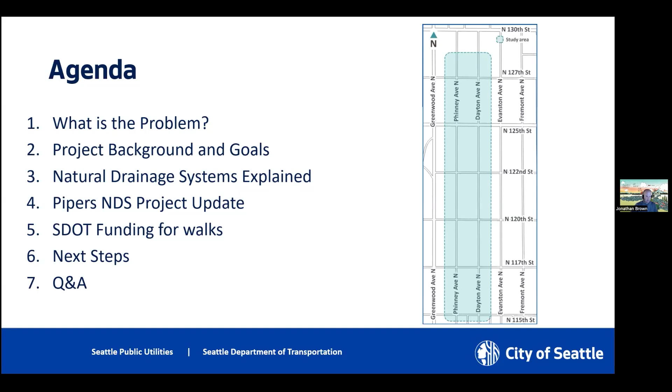So first off, we'll start with some background information on our project goals. If you've been able to attend some of the past project presentations from 2021 or 2022, some of this may sound familiar to you.

Starting at a high level about what the problem is: we live in a very watery city. We're famous for our rain, but also for our beautiful creeks, lakes, and the Puget Sound. So when water falls on the roofs, streets, and parking lots in your neighborhood, eventually it makes its way into Pipers Creek, which flows into Puget Sound. More than 370 billion gallons of polluted water from urban areas are carried into our water bodies by stormwater runoff each year. So SPU and the Seattle Department of Transportation are partnering together to help protect Pipers Creek, the Puget Sound, and all the living things that rely on the ecosystem.

So how do we go about addressing this pollution problem? First, it's important to note that the city has signed an agreement with the federal government, a consent decree, to clean up our stormwater. That program is called the Plan to Protect Seattle's Waterways. As part of the city's regulatory compliance efforts for meeting the consent decree, we've developed an integrated plan—a comprehensive program and schedule for implementing projects and other measures to improve water quality in our waterways. One of the main programs in this plan is to build natural drainage systems in Seattle's creek basins.

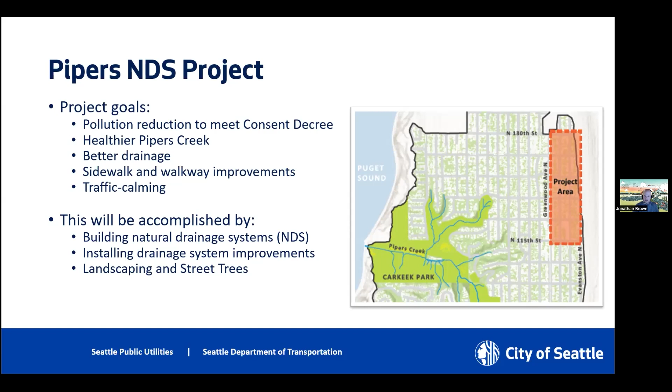The aim of the NDS program is to provide as many of these benefits as possible to the community. One way we do this is by partnering with our city, with other city projects for efficiency, and other city partners like the Department of Transportation. Coming up, Ryan Doherty will give more detail on what SDOT is looking at in this neighborhood.

Next, as part of the background, I want to explain a little bit more about what these natural drainage systems are.

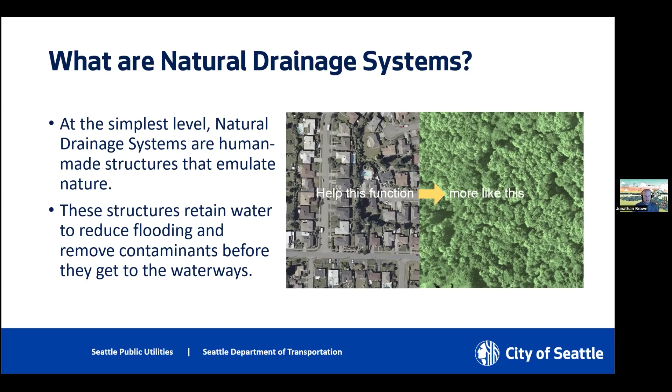This next image shows a bit more detail about how the system itself works. You can see the dirty roadway runoff flows into the landscaped areas and is slowed down by the plants, grass, and shrubs, then filters through this thick, engineered soil layer before it makes its way into this pipe, an underdrain system, where the clean water is then discharged into a deep well for infiltration.

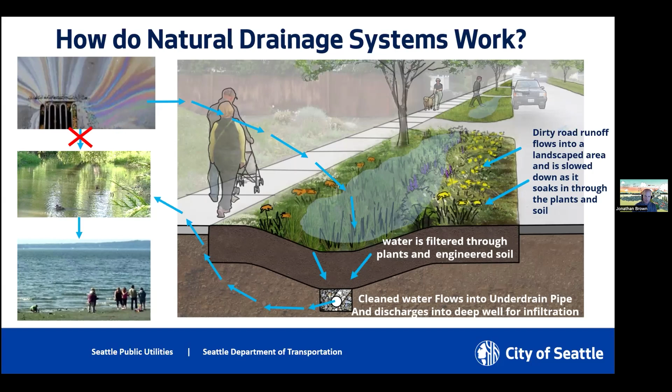The cells will have underdrains, as I noted, and they'll also be lined, so we're trying to prohibit shallow infiltration. The next slide shows the deep infiltration system we have planned. Essentially, we'll be conveying the clean water from the underdrains to the deep injection well system, shown in this image, that will distribute the water about 50 to 100 feet below the existing ground, so well below any basement footprints.

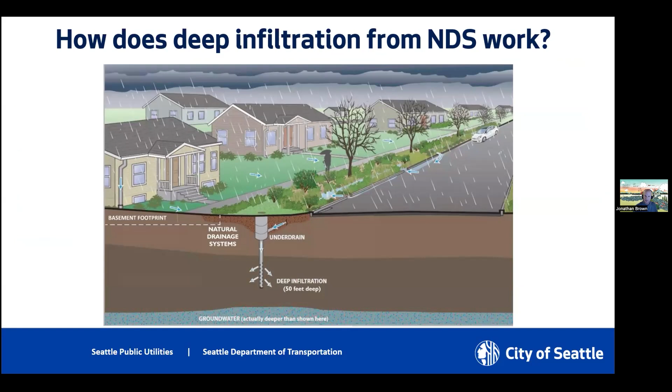Next, we just wanted to give a preview of what these natural drainage systems look like or can look like. We've been working on these projects—SPU has been working on these projects for more than two decades now.

The image on the left is in Ballard, the Ballard Natural Drainage Systems project, and that photo was taken in the spring. The central photo is the Venema NDS project, just on the other side of Greenwood, also in the Piper's Creek watershed. The last image is the High Point NDS project in West Seattle, taken in the fall or winter. So this just gives an idea of how these cells can look across different seasons.

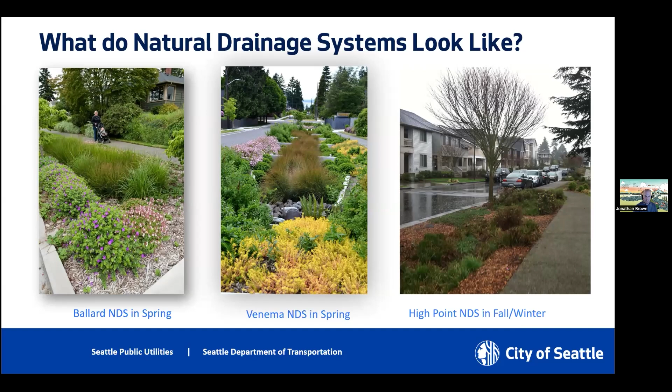The other thing worth noting about these systems is that they really rely on living plants and shrubs to filter the water, so there's a bit of a process they go through before they are fully established. This graphic is really just trying to represent that.

On the far left, that's the landscape planter strip that's been unimproved, where we will be looking to install natural drainage system cells. As we move left to right, you see a newly planted cell, a cell after one year of growth, and finally a cell after five years, once it's reached full maturity.

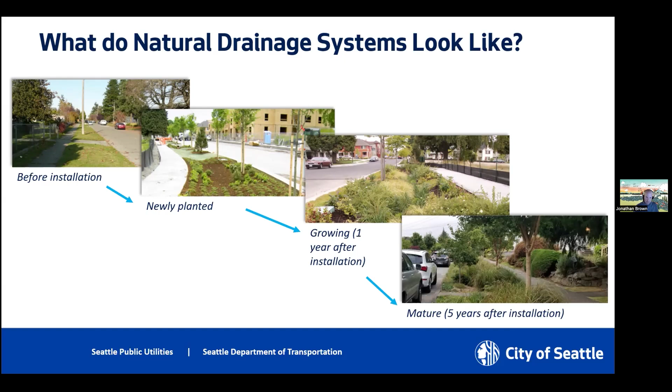Finishing up on the background, I wanted to provide a bit of a project update. We did have a bit of a restart of the project because we needed to expand the study area. We initiated our options analysis phase initially in 2021, starting with around 40 blocks, like I mentioned at the beginning, and we've been going through several stages of evaluating blocks as candidates for these NDS sites.

We performed feasibility analysis in the field to assess where it would be possible to construct these in the right of way. We also worked with SDOT arborists to determine which large trees we aim to protect as part of the project. Some of you may have joined us in the past few years when we've connected with the community in this area, including a live virtual informational and Q&A Zoom similar to this one, as well as an online survey.

Back in 2022, we developed preliminary concepts focused on Phinney and Dayton between 127th and 120th, but we realized we needed to increase the study area back down to 115th to make sure we met the drainage goals for the project that we've committed to in the integrated plan.

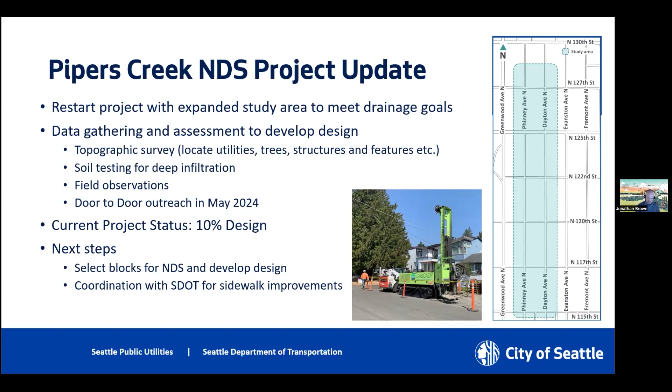Next I'm going to hand the presentation over to Nathan Polanski and our consultant team. He's going to talk a little bit more about how we decide where to put these cells.

Thanks, Jonathan. One of the common questions we get is how do we decide where to build natural drainage systems? There's a lot of evaluation that goes into siting natural drainage systems along a public street. Two of the most important things are the space that's available in the public right-of-way based on what's there today, as well as the city's long-term plans or build-out of the public right-of-way—so SDOT's plans for providing sidewalks and building out the street.

So the space that's available, as well as where drainage runoff wants to flow—typically you want to put the natural drainage systems where stormwater is collecting, so really looking at the downstream end of the blocks.

Those are two of the big technical items, but we've also been looking closely at where the existing utilities are, both above and below grade. Jonathan mentioned taking a look at existing trees and vegetation, and the slopes of the streets. The study area is generally very shallow slopes, so most of the streets from that standpoint work well for natural drainage systems.

We also look at where people are accessing houses, whether it be sidewalks or driveways, and how people are moving along the street. All of that goes into siting cells, as well as coordinating with goals from the Department of Transportation and community input.

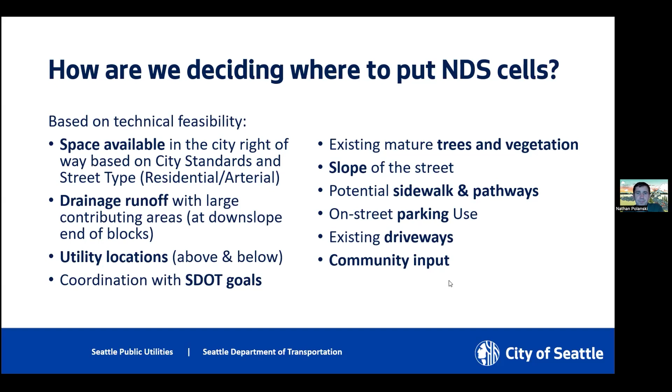Here are some pictures of the study area, showing the variety of conditions that exist along the streets in your neighborhood. The top left picture shows a lot of existing ditch and culvert drainage alongside the road edge, along with some ponding. This is due to the shallower, flatter streets, which cause more ponding alongside many of the streets in the study area.

A lot of the parking occurs off of the pavement. Rather than other neighborhoods with curbs where people park up against them, in our study area people park either parallel or perpendicular off of the pavement. That's something we take into consideration as we look at parking patterns and the configuration of the right of way. The school and church at the south end have different uses of the public right of way in terms of drop off and pickup, so we think about how those operate around those uses.

So all of these are very varied conditions happening throughout, and as I'm sure you know, very few of these blocks have existing sidewalks.

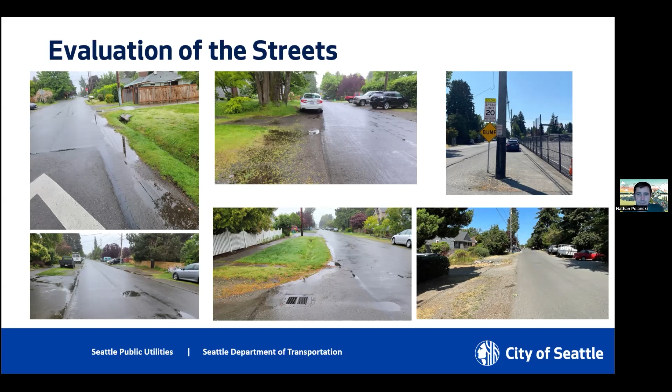So this slide shows the two types of natural drainage systems that are being considered. On the left are standard cells with graded side slopes, and on the right side of the image are cells with structural soil cells.

All of the natural drainage cells that are built will be lined. Water that enters the cell is directed into the underdrain and into the downstream UIC well that Jonathan mentioned, that discharges water 50 to 100 feet below the existing ground surface, so that water doesn't infiltrate directly into the ground near the drainage systems.

The NDS with graded side slopes are swale-like depressions that parallel the street. These are the two images on the left. These cells have really gentle slopes on both sides of the cell, on the roadway side and the sidewalk side, and have a flat bottom area to allow that collected water to pond and soak through the soils into the drain below.

The NDS with structural soil cells has that same gentle slope on the street side, but on the sidewalk side, there's a vertical surface. The drop off between that sidewalk edge and the bottom of the cell wouldn't be more than 18 inches, so it's fairly shallow.

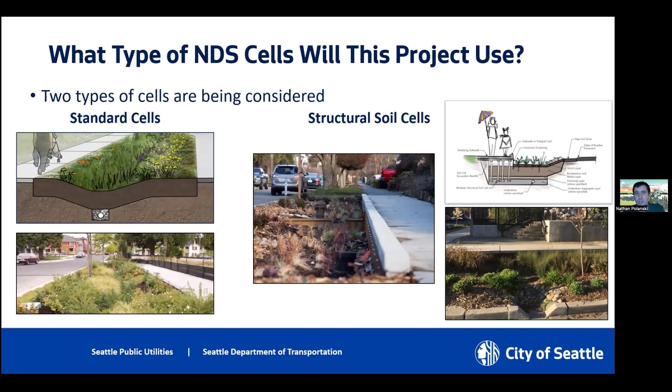This system uses a technology that allows us to put natural drainage systems under the sidewalk and in areas where there's not as much space. So when we're constrained by space or limited by existing utilities, these provide some more options. The images here on the right are from an NDS project that was constructed in North Ballard.

These next few slides show how the existing streets could change with the addition of natural drainage systems and other street improvements. Most of the streets in the study area are residential streets, so they have a 60-foot right-of-way, and what's shown in that top cross section allows for cars to travel in both directions, but really in a single lane, with on-street parking on one side of the street.

However, as I mentioned, and you saw in that image a couple slides ago, a lot of the on-street parking that happens today really happens off of the pavement rather than on the edge of the pavement, which you'll see in other neighborhoods. And then people typically walk along the road edge where there are no sidewalks. So that's the existing condition.

The middle section shows how the streets would change with the natural drainage system improvements and other street improvements. This includes widening the roadway so parking can occur on the pavement rather than off of the roadway on the gravel shoulder.

The edge of the pavement would also be modified to help route stormwater runoff down the block to the natural drainage cells, which will have the impact of reducing the puddling and ponding that occurs along many of the streets. New sidewalks will also be built on the side of the street with the natural drainage system improvements.

The bottom cross section is similar to the middle one, but it shows that natural drainage cell with the structural soil cells and that vertical surface next to the sidewalk. So these are the residential street configurations. This is Phinney Avenue North throughout the study area, Dayton Avenue North north of 125th, and most of the east-west streets from 115th to 127th.

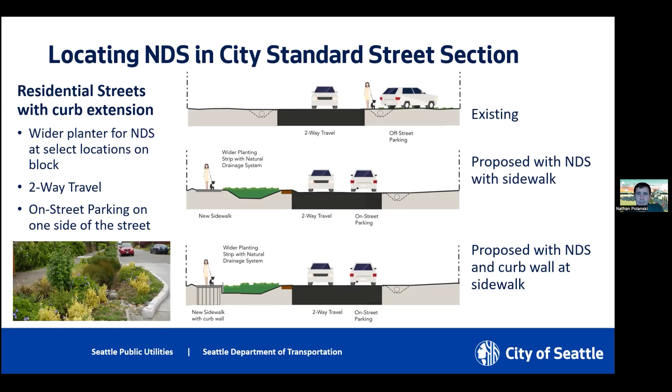The last condition to show is how the NDS could be configured along Dayton Avenue North, south of 125th. This street is classified as an arterial street, so arterials have 2 lanes of vehicle travel. Rather than the single lane that accommodates vehicles going in both directions, there's a separate north and southbound lane.

Dayton also has a 60-foot right-of-way, but to meet SDOT's street standards, street improvements would be constructed with a curb and gutter along the edge of the road. The curb and gutter allows that stormwater to drain down the block to the NDS.

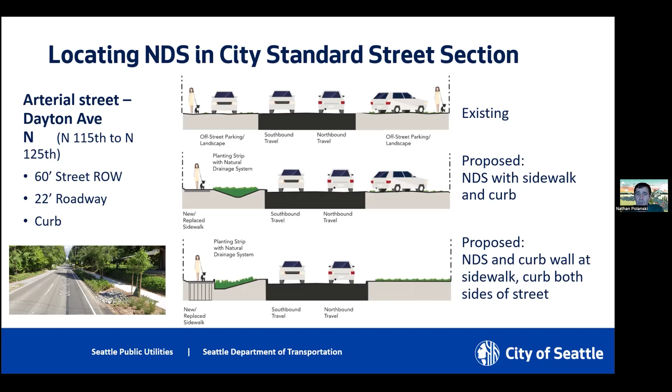However, the big difference with the improvements along the arterial is the curb and gutter will result in a change to parking. Where people can currently pull off the road to park along the road, where curb and gutter is installed, it'd be removing on-street parking along Dayton Avenue.

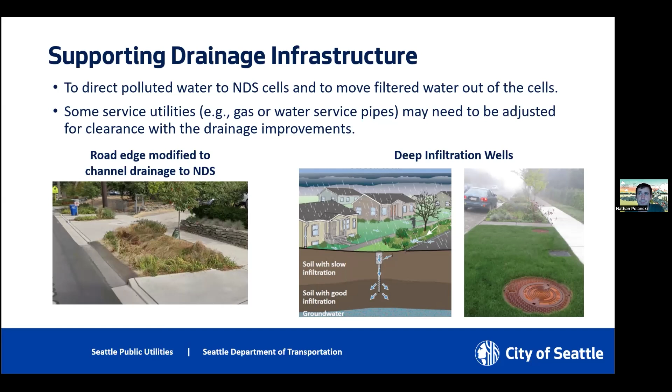Jonathan showed a map of our study area that we started with. Based on the work done to date, this shows where we've honed in on the feasibility for natural drainage systems — both Phinney and Dayton from 115th to the limit of the Pipers Creek Basin. That dashed boundary is our NDS study area. But we're showing those lines extending all the way to 130th, given that SDOT is going to participate in providing sidewalks along selected streets: Phinney and Dayton, and also some east-west streets — 115th, 117th, 120th, and 127th.

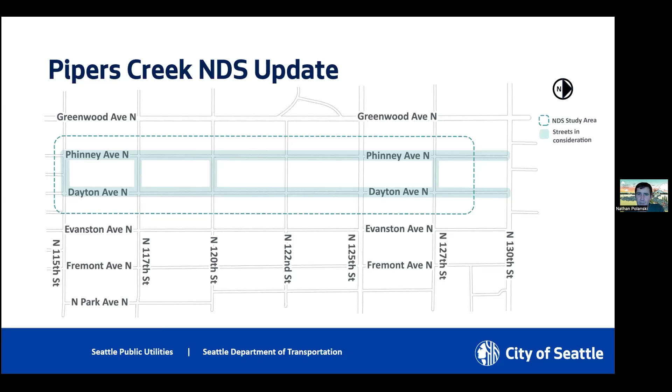With that, we turn it over to SDOT to talk a bit more about the street improvements and sidewalk improvements that are planned as we move forward.

Thank you, Nathan. As Jonathan mentioned, I'm Brian Dougherty. I am with the Project Development Division at SDOT, and I'll be talking about the possible collaboration of SDOT and SPU on this project.

As many of you probably already know, there are very extensive missing sidewalks, especially in District 5 in North Seattle, north of 85th Street. The funding we've had in the past has allowed us to chip away at that need at a relatively slow rate — at that rate, we'd expect to build out the sidewalk network in about 200 years. Not a short-term endeavor. Approximately 27% of city streets are missing sidewalks, and that number is higher on non-arterial streets, and higher still in District 5, where this project is located.

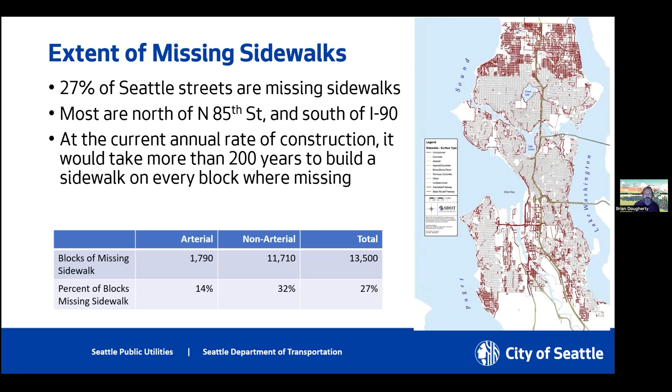Next slide. The city recently adopted the Seattle Transportation Plan, which creates a prioritization framework we use to prioritize the construction and funding of new sidewalks. In summary, it prioritizes areas close to K-12 public schools, parks and other destinations where people want to walk, transit stops, and frequent transit routes. We also include items from the comprehensive plan, like urban villages, urban centers, and pedestrian zones. We also look at safety — speed of traffic, volume of traffic, collision records — and overlay an equity network to prioritize street segments for new sidewalk construction.

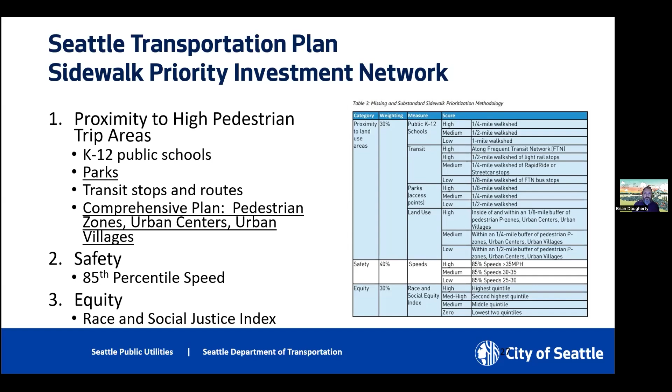This map shows the prioritization of missing sidewalks in the study area, or a little bigger than the study area. Basically, Phinney and Dayton both rank relatively high in the Seattle Transportation Plan, which is why when this project came to our attention, we said we were interested in partnering with SPU to extend the reach and the benefits to the neighborhood, so that we could build more sidewalks than otherwise we would have if SPU was doing this alone.

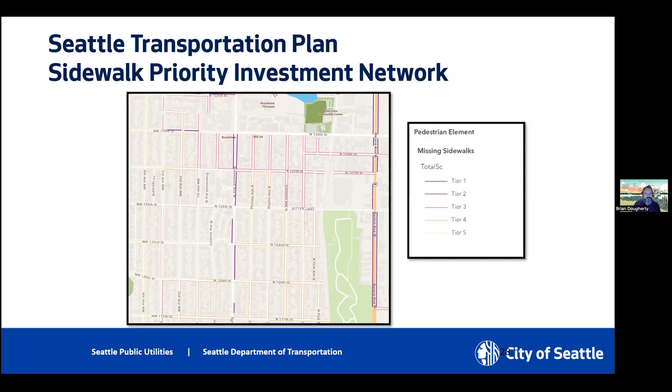Here's some examples of projects we recently completed in partnership with SPU — Southwest Kenyon Street and 24th Avenue Southwest in West Seattle. These are in the Longfellow Creek Basin, and this was a perfect example — there's a comment in the chat about extending sidewalks beyond areas where the NDS is being constructed, and that's exactly what we did here. We partnered with SPU to make sure the sidewalks connected into the existing sidewalk network, so we didn't have sidewalks to nowhere, and provided that additional funding to make that possible.

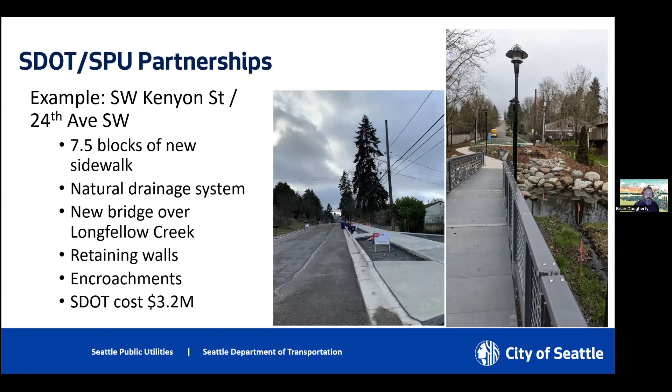Fortunately, three weeks ago we got a new transportation levy, and with the existence of that new levy, we have a large increase in funding for new sidewalks. So this is going to provide us the opportunity to partner with SPU to extend the reach and benefits to the neighborhood and build more blocks of sidewalk as part of this project.

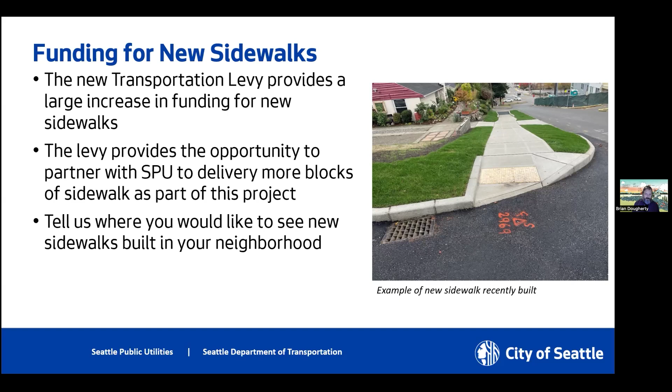Since we're early on in this planning phase of this project, we would love to hear from you. Are there destinations within the neighborhood where you'd like to walk? Or parks, schools? Are there streets where you feel sidewalks are particularly needed because of speed or volume of traffic, or because the streets are narrow? And also, we want to connect to existing sidewalks, for example the existing sidewalks on 125th and 130th.

And then I think I hand it back to Jonathan, right? Yeah, thank you Brian, appreciate that. Right.

So just quickly, we'll go through our next steps. SPU and SDOT will continue to collaborate on the design and implementation to create a coordinated project.

Please, if you haven't already, sign up for email updates on our website, where we'll send out periodic updates and promote things like this event tonight or any other outreach we have coming up. We'll be evaluating streets that are the most cost-effective for retrofitting with NDS, and that also meets the project drainage goals required as part of the consent decree.

In the spring, we will report back the blocks that have been identified for moving forward for 30% design, and the portions of the blocks where NDS would be expected.

We also have on our project website a comment feedback form. I think we'll also be dropping that into the Q&A link as well. So please go there and provide your feedback if you have a chance, and if there's anything you want to share with us related to the NDS cells or the pedestrian improvements like Brian was mentioning.

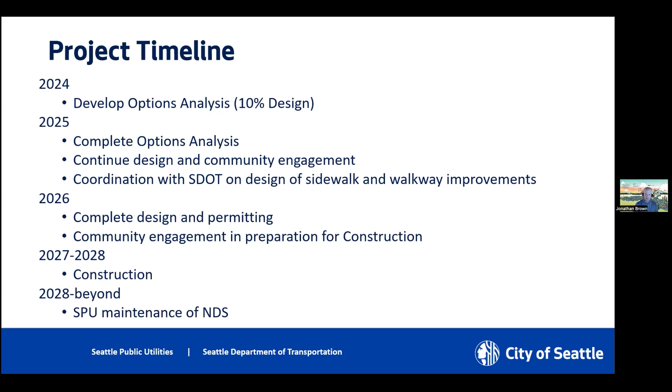At this point, we can go through any questions. Yeah, we have four. Do you want me to read them out loud, Jonathan? You can. Sure, all right.

So the first one is, how many feet from the edge of the existing road will the NDS reach toward into the existing home's front yard?

Yeah, so I can take that, Jonathan. The existing pavement that's out there today, the road is a little bit narrower than the city standard. So along all of the streets, the street would be widened a couple of feet on either side before locating the NDS. So the NDS will probably be about 8 to 20 feet at either edge from the property line. None of the work is planned to be outside of the right of way, although there may be some places where we're doing improvements to either reconnect a driveway or walkways to people's houses that could extend onto property, and those would be coordinated with property owners during the design.

A number of monitor wells have been drilled in the project area in the last 8 or so years. Are these going to be part of the project?

Those wells were all installed to get a better understanding of the subsurface soils and the infiltration capacity, and so those were done to inform the design. One of the challenging things is that you don't know where the design improvements are going to be, so the actual UIC wells that will be used to infiltrate the stormwater will be additional wells.